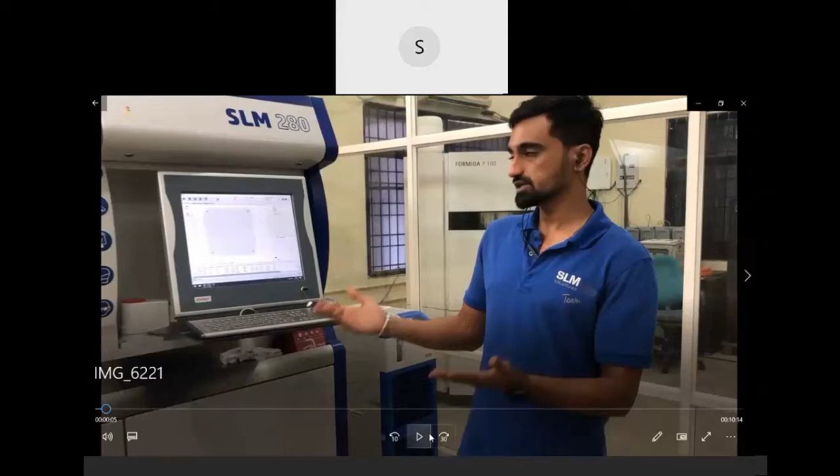Are you able to hear this voice? Yes sir, audible. Video also? Video not visible, sir. So we have to share the screen. Now visible, sir, please continue. Yeah, I'm starting. Voice is not coming, sir. Yeah, voice is a bit low, afterwards it will recover, okay sir.

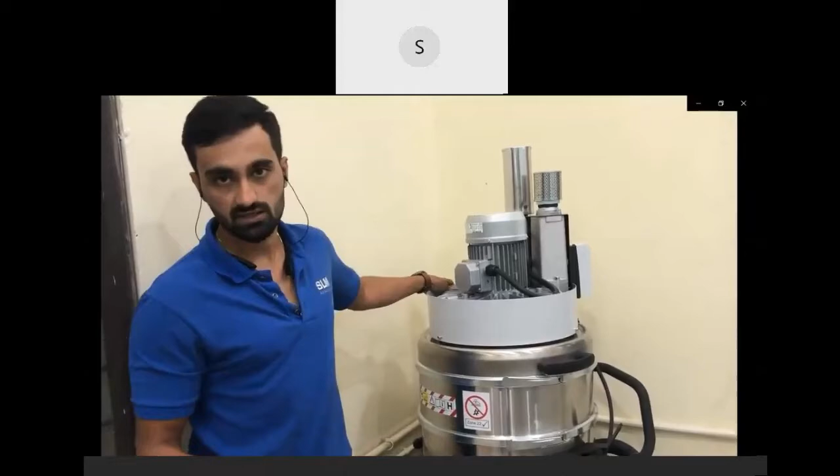Hello. Hello, yes sir, we are not getting any audio. Yeah, you are getting audio, sir. Video is fine, sir, but there is a small technical issue with the audio. Yeah, okay. Thank you.

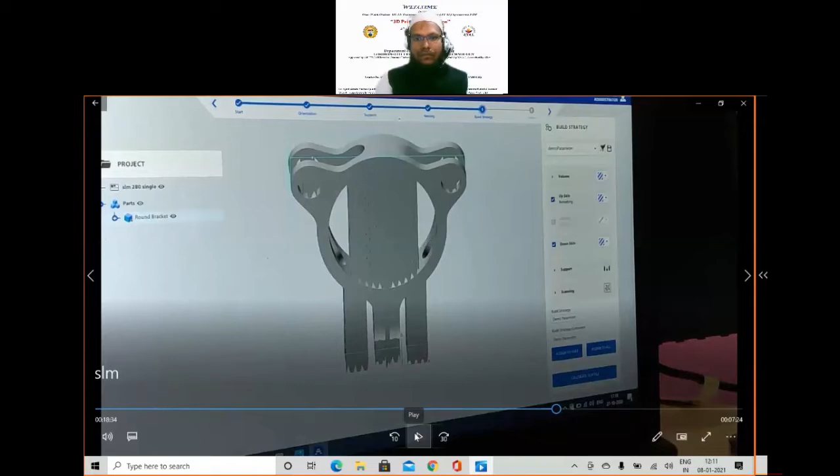Now it is okay, sir. No, sir, only video coming, sir. So this is the problem with Cisco WebEx. No audio, sir, only getting video. Earlier also having same problem. Some maybe a software problem, earlier it was working. You are also there, no? Yes, yes, sir, just please continue and explain the things. No problem, sir, just continue.

There is no problem with Cisco, sir, as we are getting the video and internet connectivity is also nice. There is some problem with the audio of the clip, I think. Again we are coming back. Sure, sure, sir, please take your time.

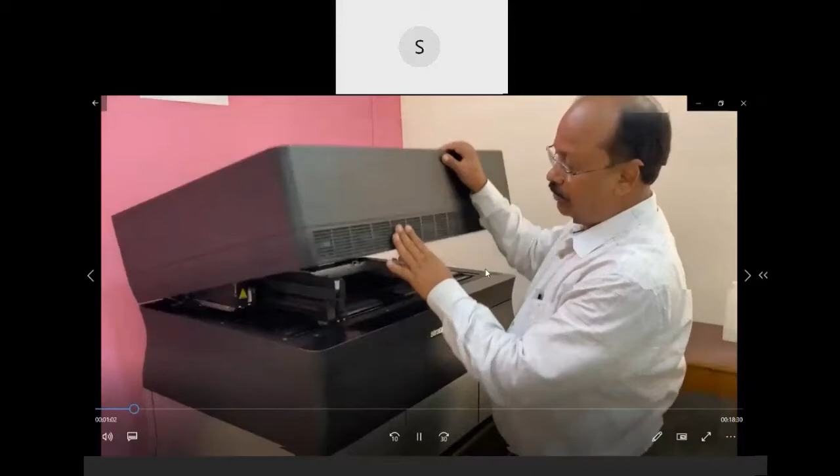Sir, you just explain yourself, explain the things which you are showing in the video, no problem. What do you say, sir? Sir, you please just highlight some of the points which you are pointing out in the machine. The video is playing. Okay, okay, yeah, yeah. In between, we'll stop and highlight. Explain. Yes, sir, sure, sir.

Sir, am I audible, sir? Yes, sir, you are audible. So now I'll be explaining this video now.

This is actually PolyJet technology which we are showing you here. We are having Stratasys PolyJet machine with us in our lab. Okay, please proceed.

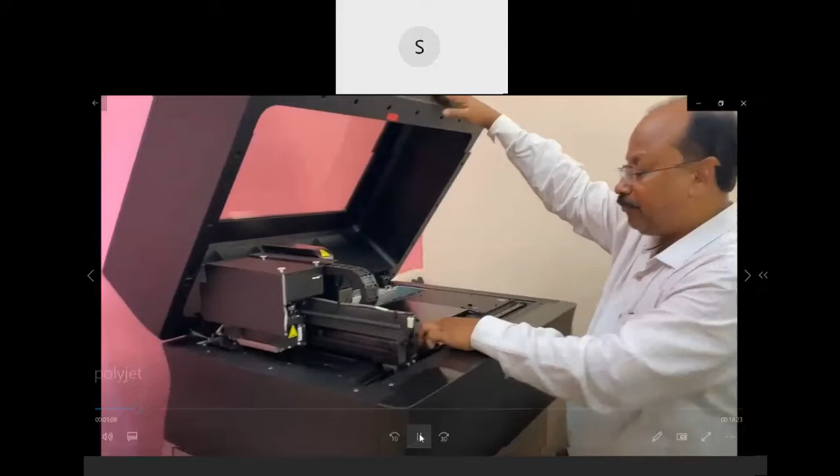So this is the build platform. This is x-axis, y-axis, and z-axis. X-axis is 300 mm, Y-axis is 200, and Z is 150. And this is recoater, these are nozzles. So these are model materials nozzles, and this is support material nozzle.

So recoater will move in this direction, and nozzles will be jetting resin onto the build platform. And UV light will be used for curing the jetted material.

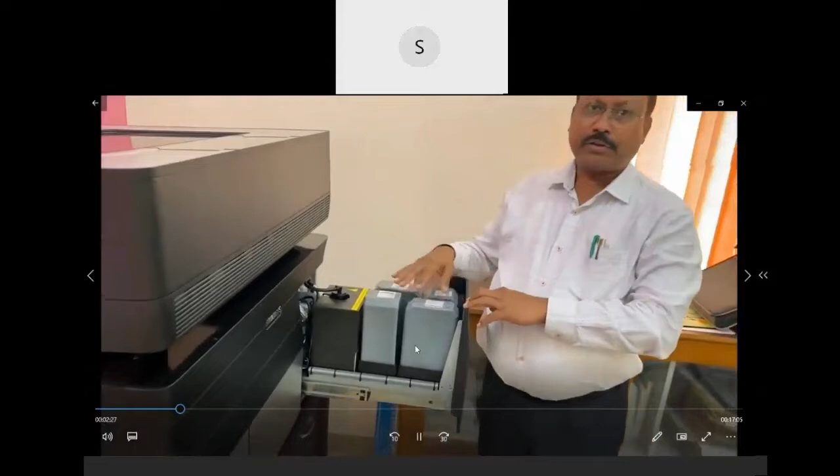So these are different cartridges, material cartridges. This is waste tank. So 2 model materials and 2 support materials are loaded in this machine. So in Stratasys machine, we can use around 8 different materials, all belonging to Vero family. And in CPTTM, we are having Vero White and Vero Clear with us.

So these are some parts which we printed in CPTTM. This is a transparent material, and this is Vero White, some MTech student project.

For PolyJet machine, we'll be using Objet Studio software, supplied by Stratasys only. In Objet Studio software, we'll be having 3 options: tray setting, model setting, and job manager. In tray setting, after loading part, you can do all the settings required.

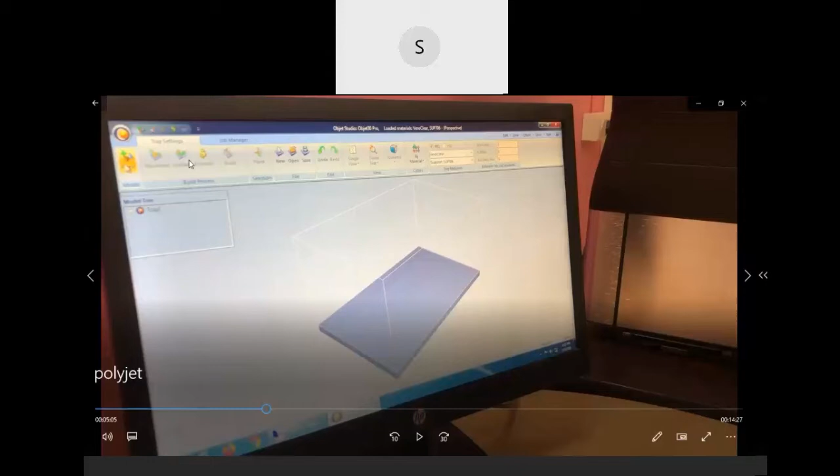In placement, by default, the parts will be placed on this build platform. Validate will validate any design errors. If at all there are any design errors, you can validate them, and if print is not possible, validate will get errors. And estimation, cost estimation, how much material it takes, all those things will be stated when we click estimation.

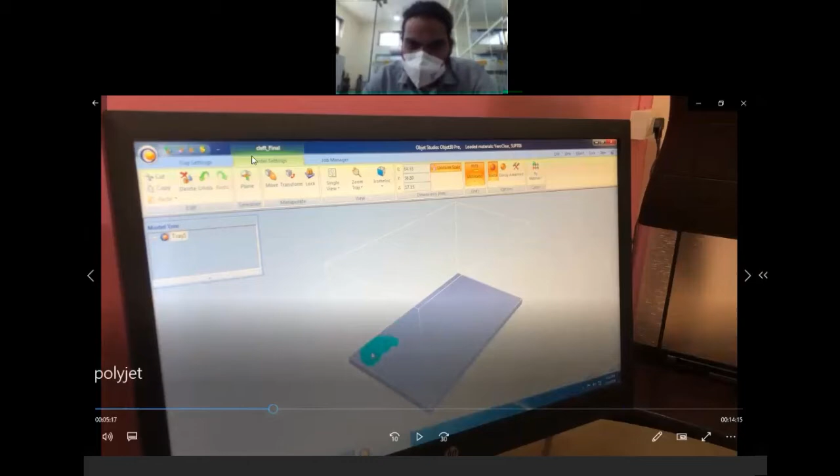Apart from this placement, we can manually place the part also. See, I have inserted a part left here. You can move it somewhere, adjust the position, rotate it at different angles, transform, scale, reduce the scale of the actual part - all those things you can perform. Here in this Objet Studio, we are not having leverage of playing with supports; by default, it will generate supports in Objet Studio software.

So once I have placed the part, after placement and validation, I have clicked estimation. So here it is showing that for the given part, it is taking 1 gram of Vero, and support is taking 3 grams, and total build time is 1 hour 32 minutes.

So once we've done all this placement, validation, and estimation, we'll directly go to job manager. See, this is the job manager window. These are different jobs which we have given. We can add jobs, remove jobs, manage all of this here.

So once we go for job manager, the system is ready to take the job, but you have to also accept it in the printer. So this is the printer desktop. We have connected to the Stratasys PolyJet machine using remote desktop. So here in remote desktop, this is actually the machine details you can find out here.

So here we have seen 4 materials, 2 of support, 2 of model. Same thing you can see here in the machine. So these two are VeroClear, which is model material. Model material is the actual part we are going to get, and support SUP706 is the support which we are using.

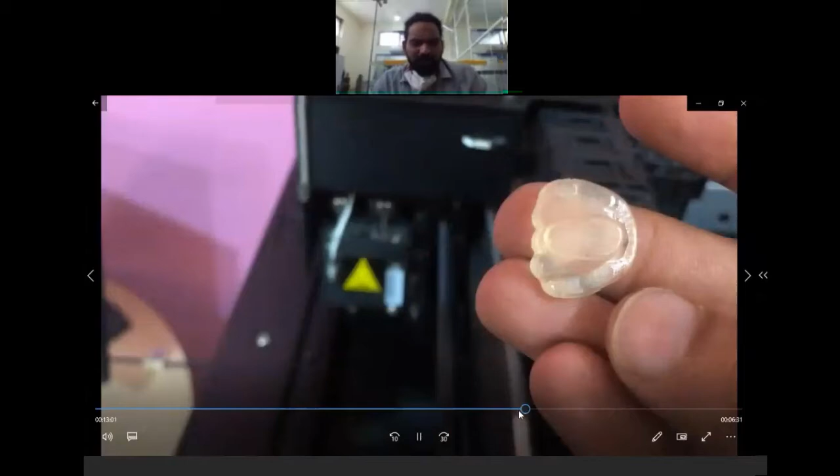After 1 hour 35 minutes as shown, we are able to print this small part. Actually, I have reduced the scale, scaled down the actual part. Get me the cleft, the actual cleft. We have reduced the scale of that part very much.

Now we'll go for post process. You can see the support all around that. See, all around that you can see that support.

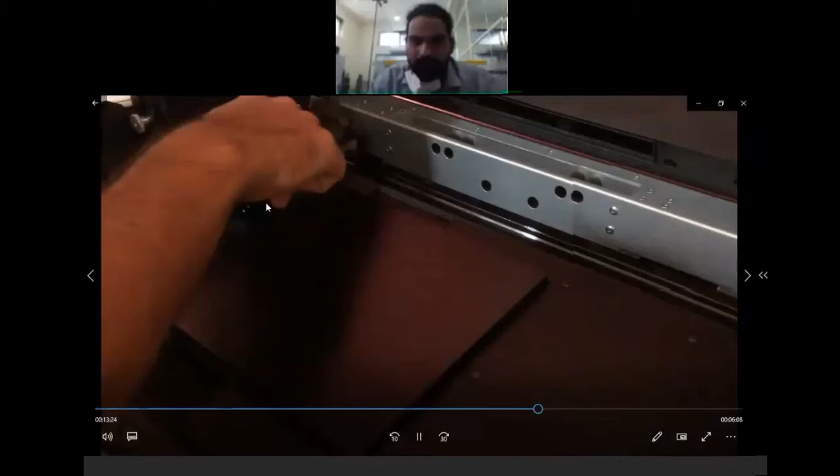After each and every print, you have to clean the heads using isopropyl alcohol, and you have to also clean the nozzles. There are some wizards which you have to perform for cleaning, like heads cleaning, all those things.

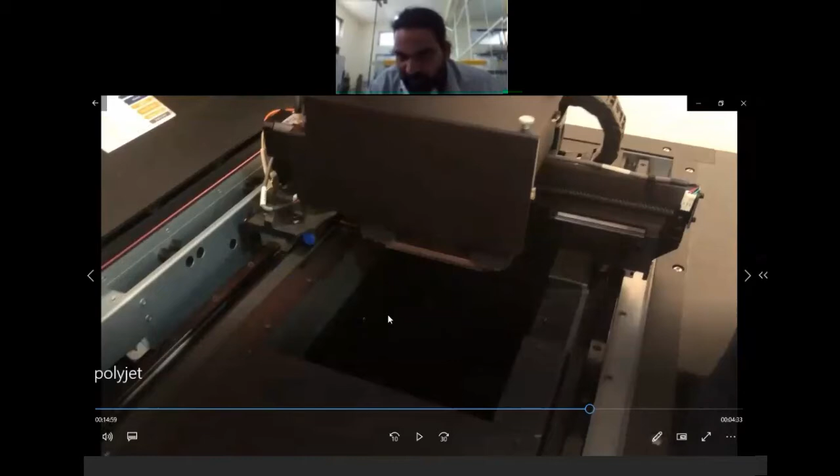So here you can see the workbench went to complete down. So now we will be able to clean the nozzles. Here you will be having a wiper.

See, in PolyJet technology, take this part, it is placed on the workbench. When it is jetting, it doesn't use all the nozzles continuously. At regular intervals, some nozzles will be idle, so the resin in those particular nozzles gets clotted. So at regular intervals, material will be jetted and this wiper will clean it.

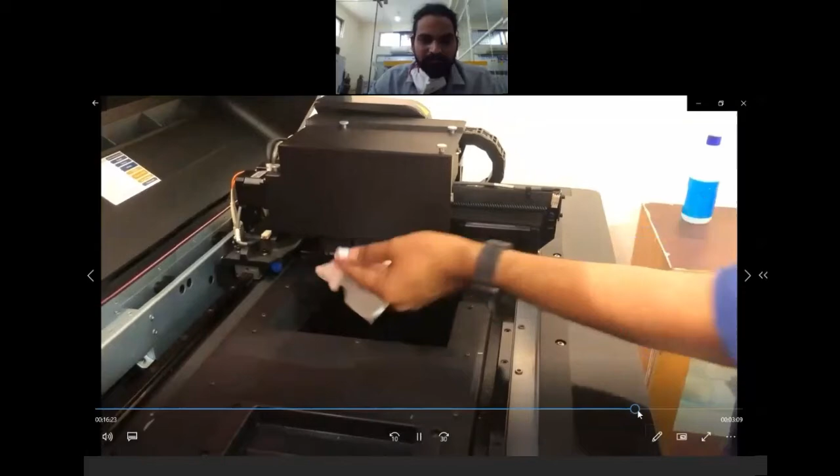So once cleaning is done, we should make sure that nothing is placed on the build platform.

So now see, this is the water jet post process unit, PolyJet's post process unit. Using water jet we will be doing the post process, but you can see this part is very complicated, it is very small, very small. See, this is the actual part I am showing in the camera, and I have scaled it down. You can see that.

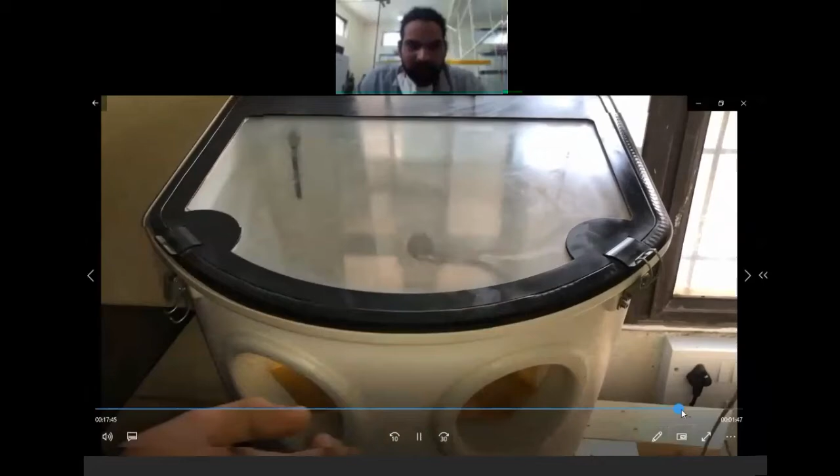Now to perform post process of such complicated parts, you can't just water jet it, the part will break. So we have used sodium hydroxide to perform post process. We just took sodium hydroxide pellets, added some water, and dipped this part into that. If you keep the part in for a long time, your model material will also get melted out. So you should monitor it properly, dip it, take it out. That is how post process is done for such complicated parts.

You can see that actual part and scale reduced parts. This is the beauty of Polyjet technology, where you can achieve very complicated or small structures also. You can just print it nicely.

So just give me 2 minutes, I'll come back with that SLS technology. Sure, sir, sure, please take your time.

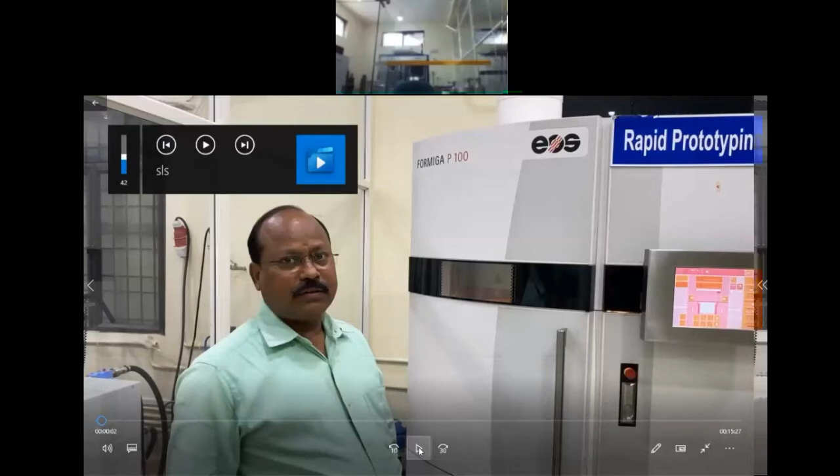Sir, can you see our screen, sir? Visible, sir, please proceed. Professor Sriram sir, yes, he is visible. SLS system, audio is coming, sir. Yes, thank you, sir. Now sir will be explaining about SLS technology.

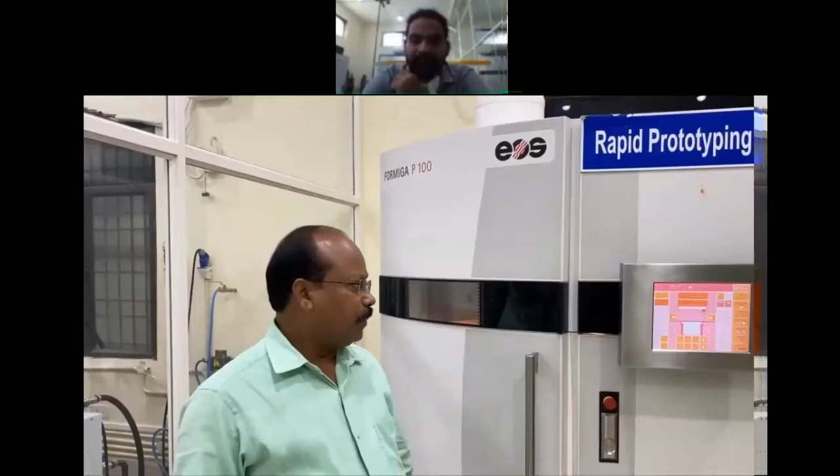This is the STL file, and the STL file will be opened in Magics. This is Magics, the software we use to edit the STL file. I am loading the housing final STL file, load the part, desktop, housing final, open. So this is actually the housing final component we have loaded in Magics software.

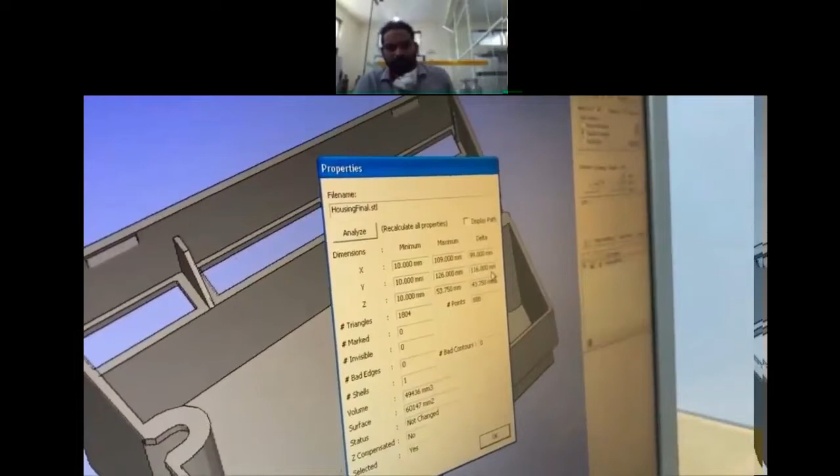We can put annotations, scale the part, and add text. If you click this, you get information that this part has x-axis 99 mm, y-axis 116 mm, and z-axis 43.75 mm. The total volume of this component is 49,436 mm cube.

So now we have this information over it, and after that we can slice it. After completing this part, we have to slice it using the EOS RP tools software. So this is EOS RP tools, I'm opening the slicing, and it is finished. After completing the slicing, any errors are removed. This is the slicing software.

Then we have to save the file, whatever name you want to give, housing final, on the desktop. I am saving it. Housing final.

This is the SLI file. The first step is the 3D CAD model, then the second step is converting the 3D CAD model into an STL file, which is edited in Magics software, and then it is sliced. So this is the slicing file, and the slicing file has the extension SLI.

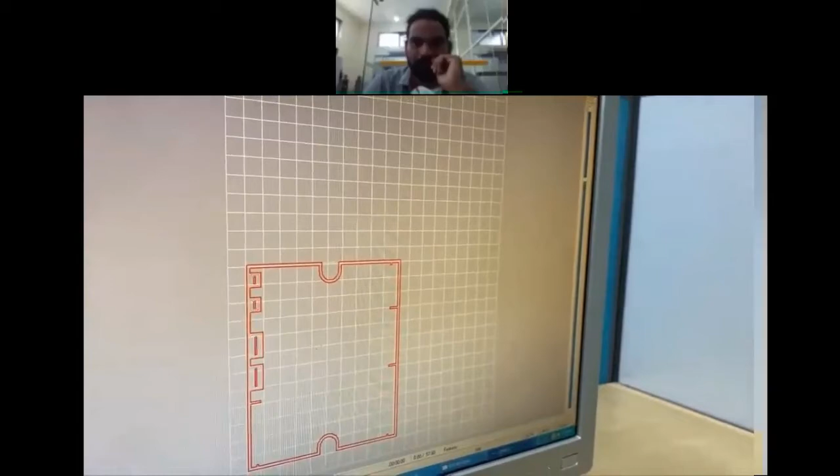So it is loaded. Now if I move the bar like this, all the layers are visible, you can see up and down. That means the size here, up to this blue bar, is around 58. If I click down, all the layers can be viewed.

After this, suppose if you want to stack - this red is the border of the part. You can move it too, translate it like this, and put it anywhere.

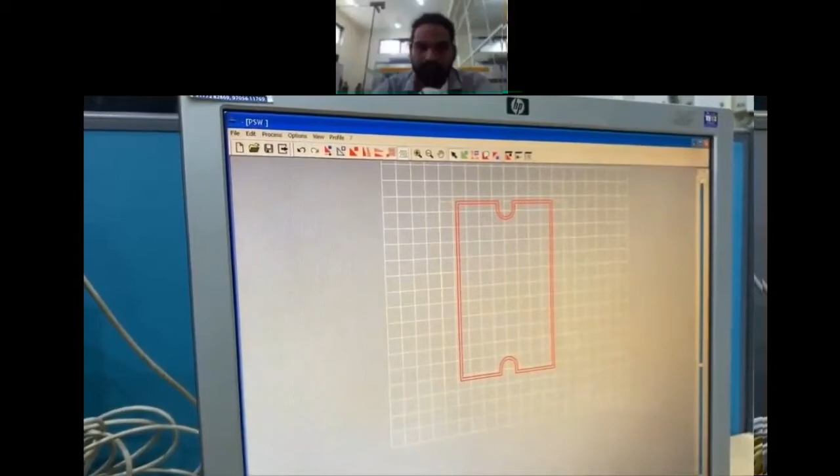Afterwards, here you are going to see how much time it has taken - you can calculate the time. So for this build, what is the time needed to complete the task? If I start it, it is calculating the time to build this component. Not only one component, but all the components stacked in the X, Y, Z direction will be calculated, and afterwards it gives us the time to build the component.

So calculations are made here also. Here you can see, okay, 70%, 80% completed. After that you can see the estimated time for completing the task.

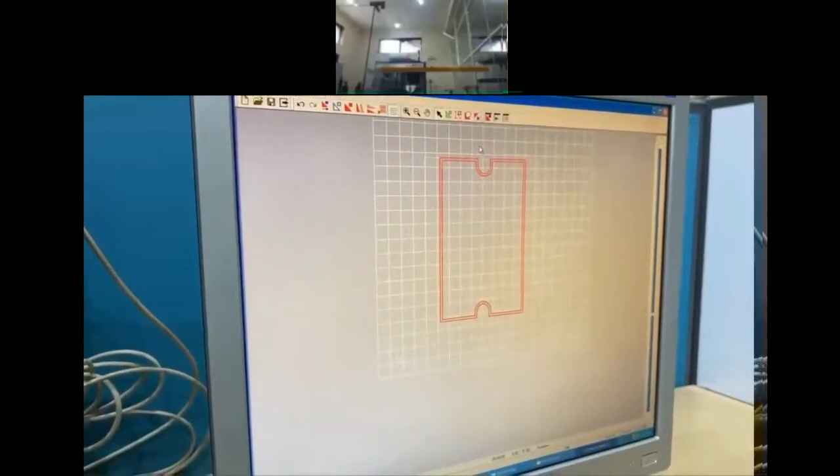Okay, so how many hours? 3 hours 47 minutes is taking to complete the job. This is for estimation purposes. These are exposure parameters, so all these details are available whenever required.

After this, there is a small icon here. This icon exports the building task to the machine through a backside RS-232 network cable. So I'm just sending now. This is sending. After sending, this is actually the machine name: the SI726 is the machine name.

An example is given, and if I start it now, it slowly exports this component into the machine. So I'm just sending it, you can see.

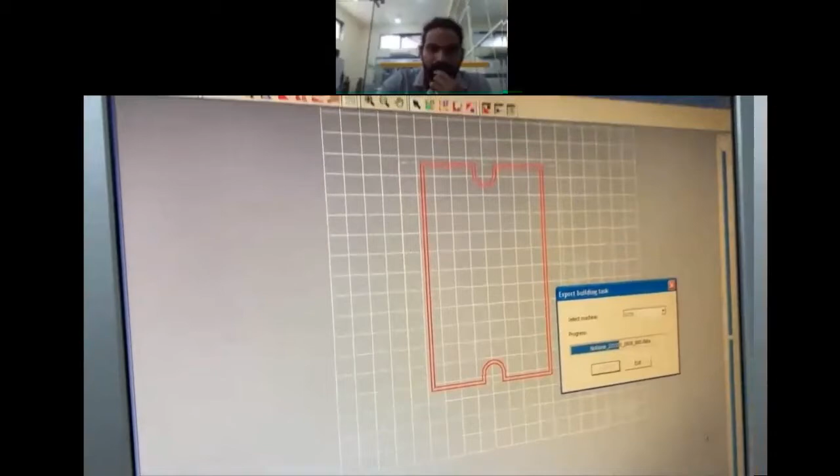All the layer information is sent into the machine. Here, what we have given as the name is part housing final. You can also give names here like job 1, job 2, job 3, job 4. So there's the STL file, SLI file, and JOB job file.

So now it is exporting to the machine. After sending to the machine, we have to load it onto the machine, keep the warm-up phase on, and the process starts.

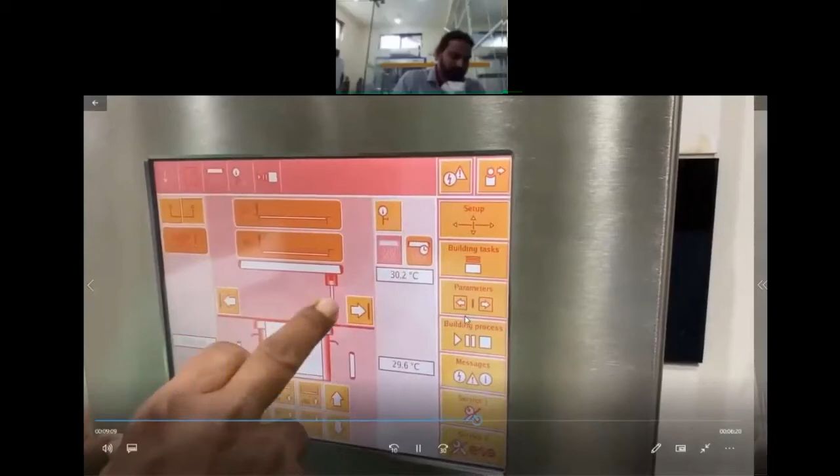This is actually a monitor where all the activities from starting to ending will be displayed, and we can see how the part is loaded. This is actually a recoater moving left to right.

Suppose if I press this, the recoater will come here. You can see it moving to the left. If I press right, the recoater comes from left to right. So manually we can spread the powder on the platform.

At least 5 to 10 mm platform thickness will be there. This is actually a shutdown button, and this is a setup for the building task.

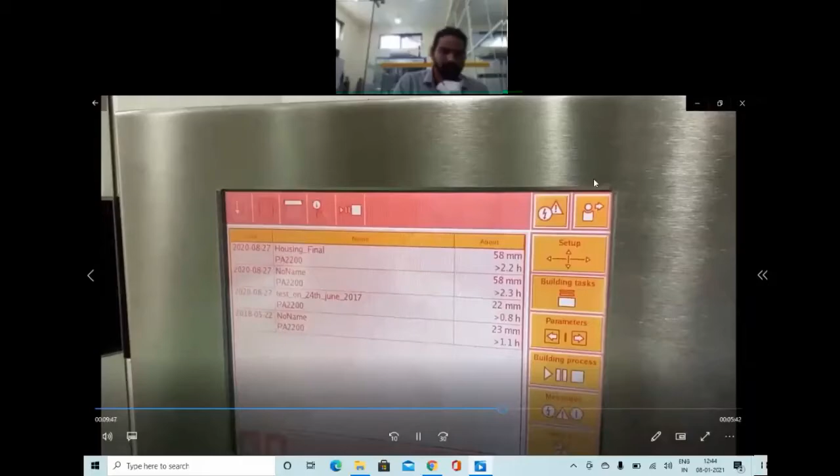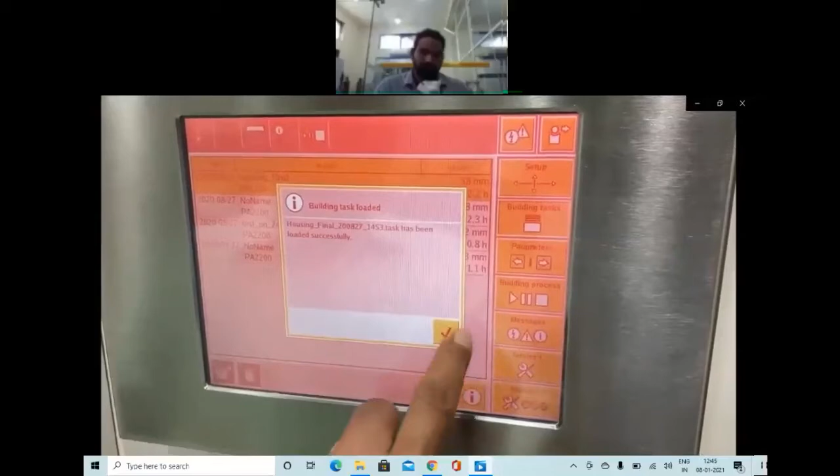Suppose if I press the building task, these are the various jobs already loaded, such as the housing final or similar names. If I press this, it displays that we now have to load it, and it will immediately ask if the housing final job or task has been loaded successfully. Then we can press enter.

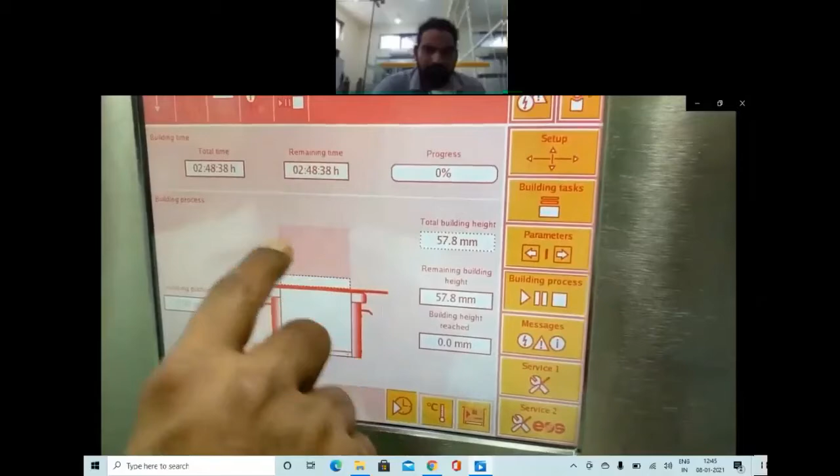Similarly, we can see all the parameters for the building process. After loading the housing final, the actual build task is housing final. This is the height of the part to build. It is taking 2 hours and 48 minutes, and the remaining time is also 2 hours 48 minutes since it is yet to start. You can see the temperatures.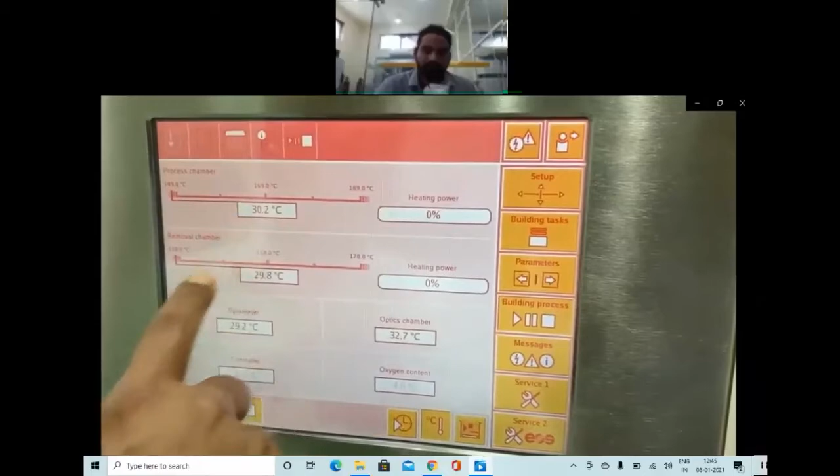These are the temperatures. Right now it is 30 degrees centigrade, but we have set 169 degrees centigrade for sintering of that particular part.

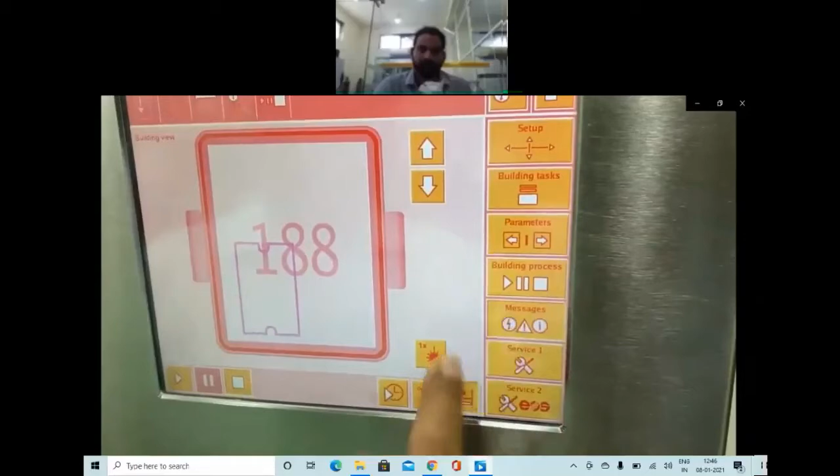So these are the layers. And whatever you press, from starting to ending, all the messages will be displayed. So the laser is not ready - this is the laser.

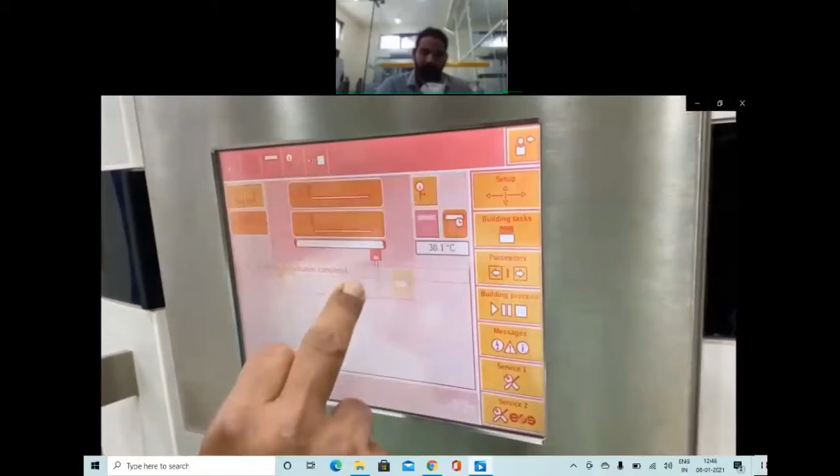I am just pressing the yellow button. Now in setup, we have the preheating time. Once a job is loaded, we have to press this icon to have preheating - the warm-up phase. This is the first phase: the automatic warm-up phase of the chamber to sintering temperature.

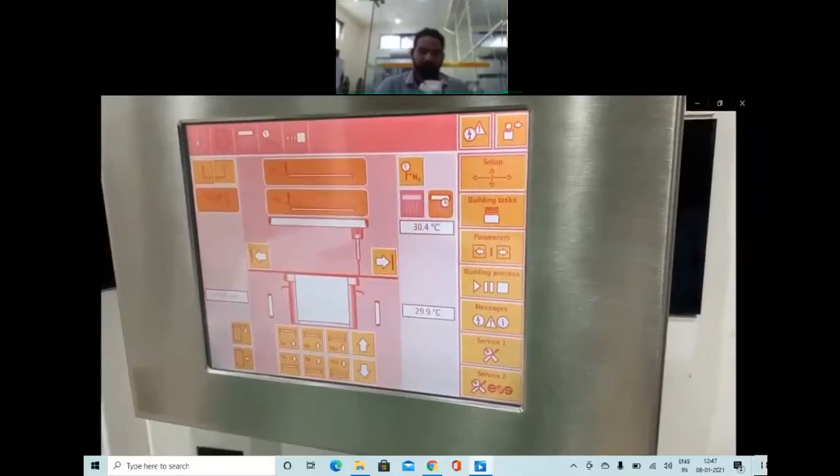I am putting it on. Now warm-up has started. After warm-up, automatically the recoater will spread the powder from left to right, and the platform temperature rises to 169 centigrade, taking almost 1.5 to 2 hours.

Then it starts building. Once building is completed, we have to wait almost building time equal to cooling time, and then we have to remove the part. After completing the building, we have to load the platform.

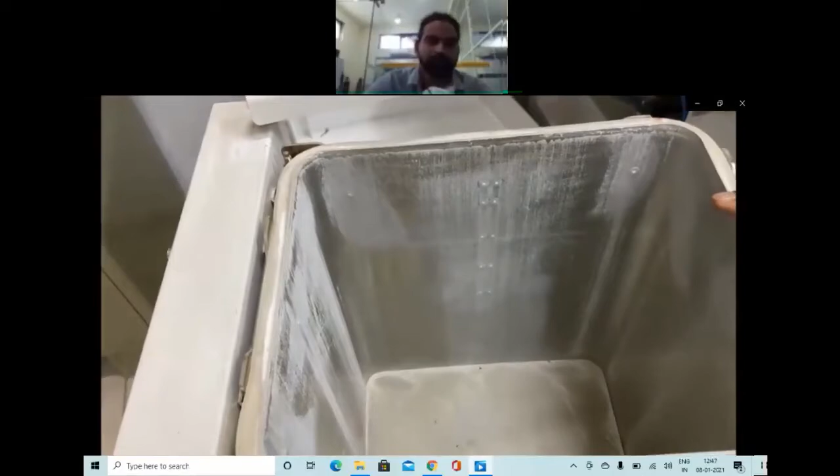This is actually the x-axis, this is the y-axis, this is the z-axis depth. So we have to load like this and eject the components.

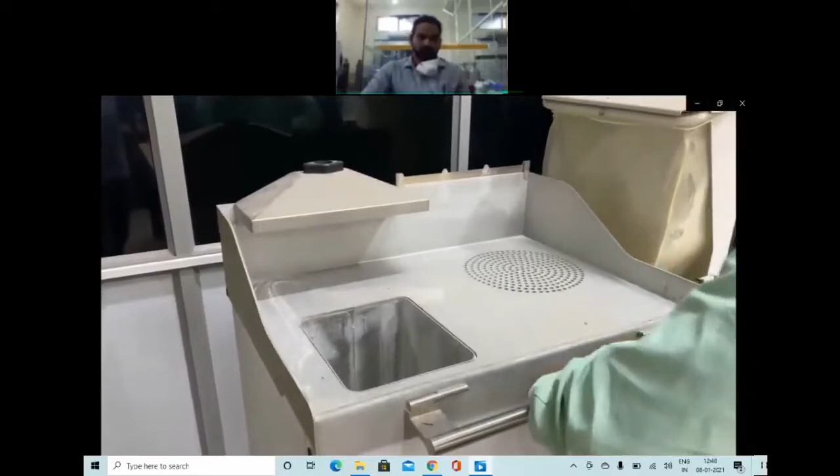Right, so we have to load like this. It is a pneumatically operated post-processing unit, and we have to close it like this, then eject slowly. For ejection we need gas, compressed air.

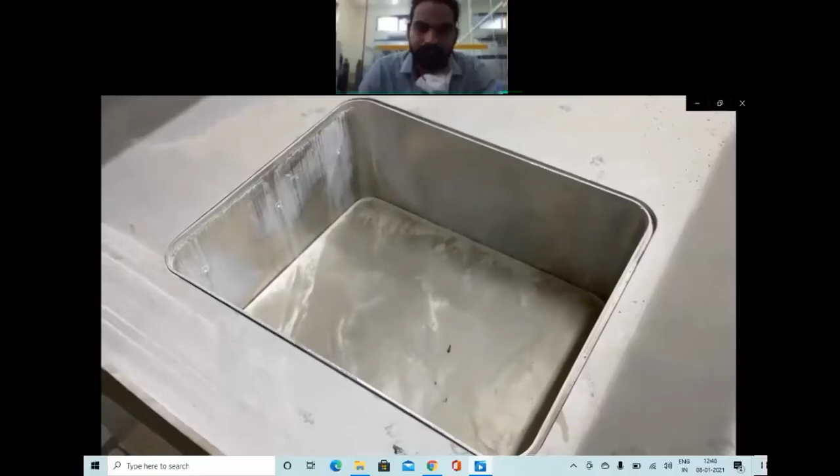The parts are ejected, and we have to clean the part. The excess powder will be collected here, and we have to keep one bin over here. After collecting all this unused powder, we can use it for the second run.

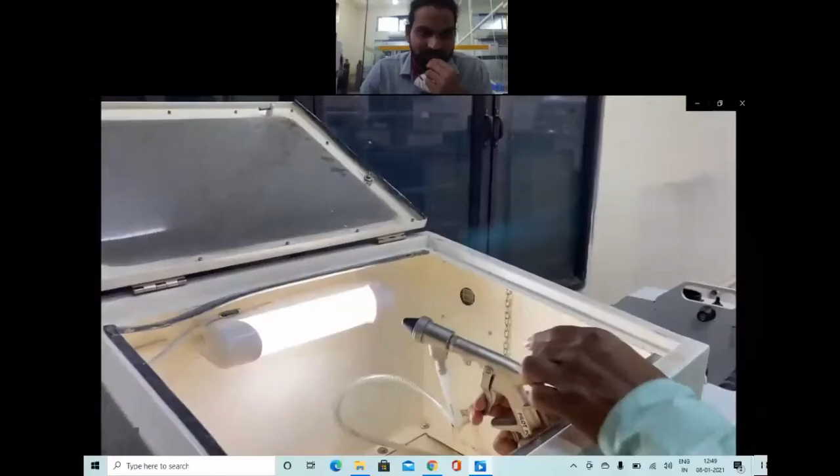After removing the components from the bin, we have to clean them through a blaster. This is a blaster gun. With the help of this we can clean it. We have to put two hands here, close it, and then clean through this gun. This is the last step.

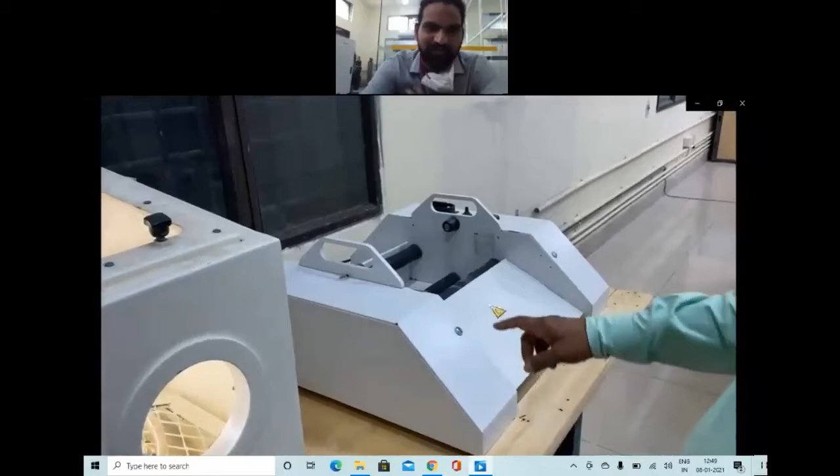After using the powder, the used powder and new powder have to be mixed. This is a mix of new powder and old powder together, for example 70-30 or 60-40 ratio of old to new powder. Before mixing, we have to measure through a beaker or something like that.

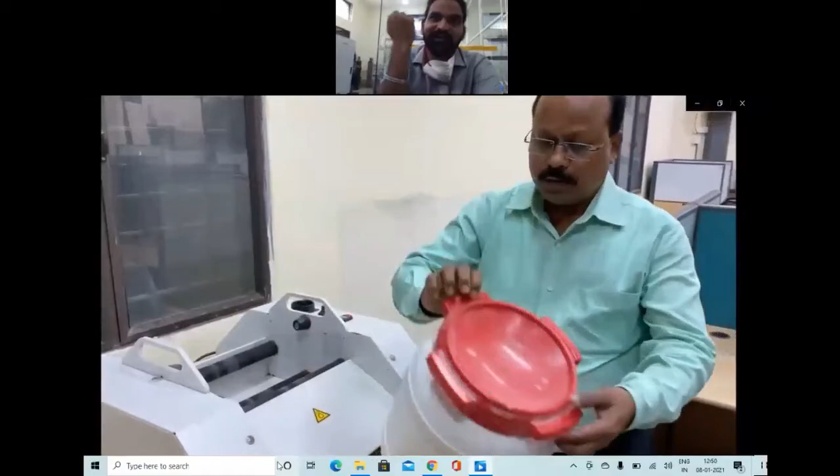After pouring into the bin, we need to mix thoroughly for at least 45 minutes. This is the mixing station. After mixing, we need to keep the bin on the floor for at least 30-40 minutes to remove the static electricity, so that the powder granules will not carry any static electricity.

So those are the three technologies which sir is supposed to explain: SLS, PolyJet, and SLM technologies.

Sure, sir. Sir, do we have any time? Can we play the SLM post-process, like the printing process? Actually, there is a lunch time, so if you conclude in 5 or 10 minutes, no problem sir, as we are running short of time.

Actually, the videos didn't play properly. No problem. For SLM also, we have done a printing and we have removed the parts. In the last class also, sir explained and showed some videos regarding that. Yes, it is almost the same.

So sir, just highlight what are the various products you have manufactured in the CPDDAM lab. From the SLM machine we have... In PolyJet, we have done some projects, but so far we didn't do any customer products, only projects using PolyJet. Using FDM, we have done many. Whereas with SLS, sir has done many projects. In yesterday's presentation, you have seen many parts sir has shown. SLM, we have just printed 2-3 samples, as it is a recently installed machine.